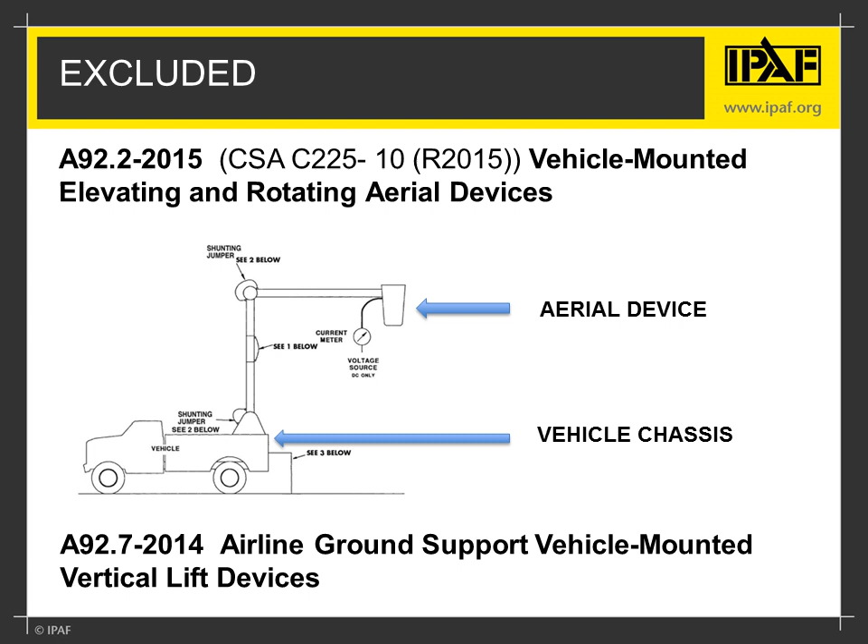So the list of current A92 and B354 standards listed by equipment type, which are in existence, will be moved over and covered by the design standards with, as I said, the noted exception that truck-mounted bridge inspection maintenance equipment will be included in ANSI and excluded in Canada.

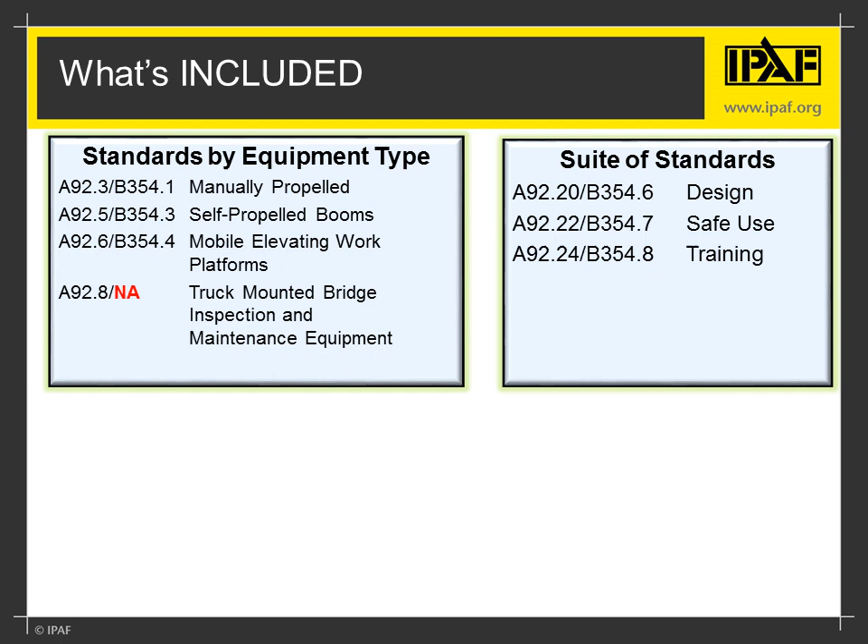So that's the type of equipment. To be clear, there are differences between the ANSI A92 standards and B354 standards. While there has been a desire to more closely harmonize industry standards worldwide, there continues to be variances. Some of the differences carry forward from prior variances in the existing standards.

The current Canadian CSA B354.1 portable elevating work platform standards previously included towable and track-mounted aerials and will continue to be equipment covered in the new suite of standards. The current ANSI A92 standards cover towable aerial work platforms in the A92.2 standard, vehicle-mounted aerial work platforms, which will remain as a separate and active standard, and as a consequence, the towable aerials will not be covered in the new ANSI suite of standards.

This is one example of why you need to read and understand the standards that apply to your country and have technical resources available to you to assist in the knowledge you need to comply with these standards.

Another example of a variance in the requirement is special inspections at 10 years in the B354 standards, which is not a new requirement and remains in the B354 suite of standards, but is not a requirement in either the prior nor the new ANSI A92 suite of standards.

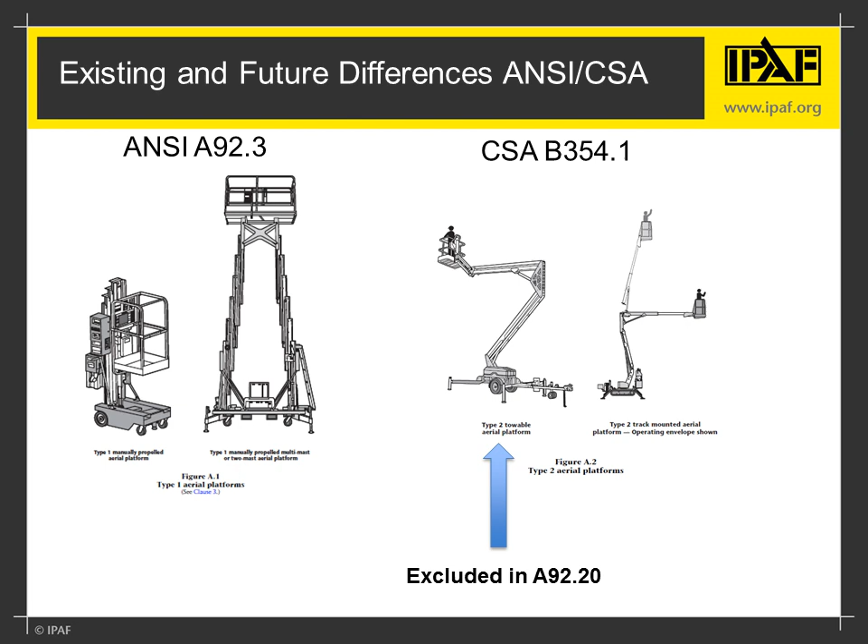So I need to clearly state that guidance in today's presentation is a summary of key changes and does not address all changes within the new standards. The standards must be read and understood to address all of your responsibilities.

The new suite of standards were drafted with the desire to bring country standards closer and harmonize language. The ISO standards were used as the foundation for the proposed changes of both the Canadian and U.S. standards. And the Canadian standards are relatively close in design to the language in the ISO standards, and when they were actually completed, the drafts were so close that the Canadian standards adopted the ISO standards with Canadian deviations.

The existing CSA B354 standards and the ISO standards were written around required tasks: design and manufacturing, inspection and maintenance, safe operating practice, and operator training. In contrast, the ANSI A92 standards were written with each section defining responsibilities for an entity - manufacturers, dealers, owners, users, operators. In this regard, the contrast between ISO and CSA B354 is much closer, while ISO and ANSI are significantly different. Additionally, the ISO standards are written by task.

So there's a design standard, a safe use standard, and a training standard that apply to all types of MEWP equipment. But the prior B354 and ANSI A92 standards are written by equipment type, such as portable elevating work platforms, self-propelled booms, self-propelled verticals, and scissor lifts. And the change in structure of the standards will make the initial change from the existing to new standards seem even greater. Keep in mind that the same equipment and the same basic tasks - design, safe use, and training - are there, but the structure of the standards delivering the wording is in a significantly different format.

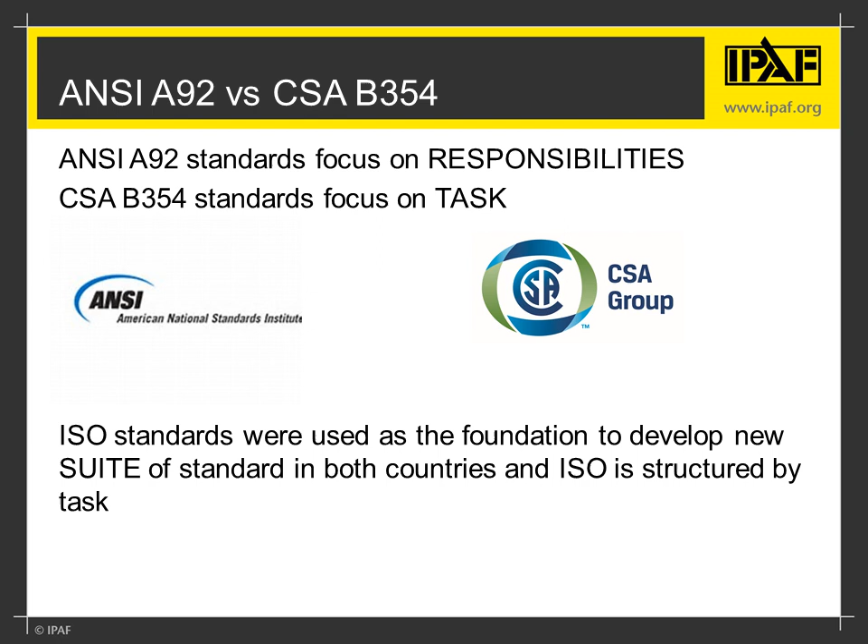The new design standard alone is 70 pages. The safe use standard is 26 pages, and the training standard in Canada is 8 pages long and 19 pages in the U.S., and we'll talk a little bit more about that discrepancy a little bit later. But you can understand that there are important requirements, changes, and details in the new standards that you must become familiar with.

To provide a particular word of guidance, the new B354 standards are an adoption of the respective ISO standards - design, safe use, and training - with Canadian deviations. As I have never seen an adopted standard with deviations before, I assume many other users have not either.

As simply as I can describe it, you are reading a section of an adopted ISO standard, and at the end of each section, you'll find a Canadian deviation that directs you to replace the entire section, or a paragraph, or a sentence of the section you just read with new language. This can pose potential errors if you do not apply the correct language.

I caution you to take the time to cross out language that is to be replaced in your copy of the standards to ensure that all deviations are applied as required. As you can see in the example, the section above that's not highlighted is the old language, and the section that's highlighted is the new proposed language, and that's one section of one of the standards.

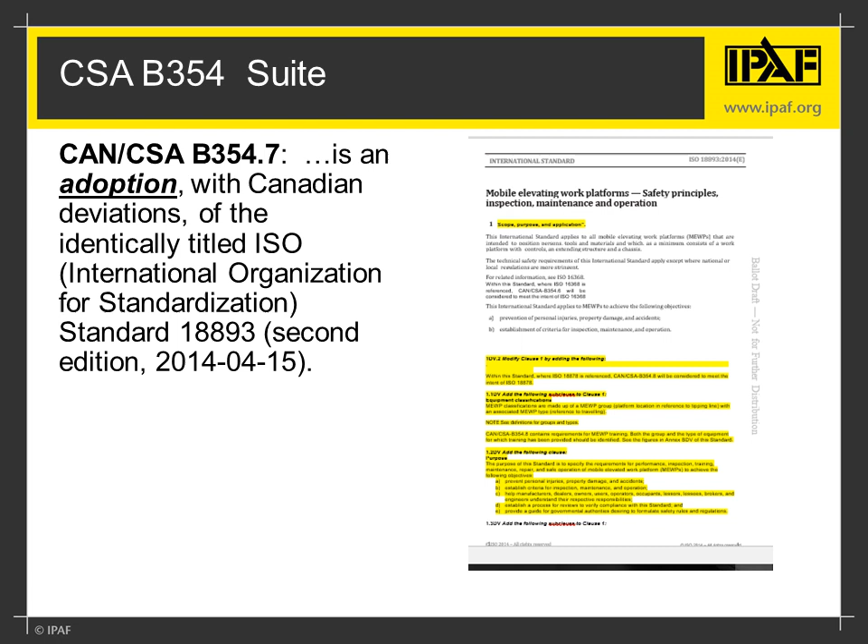My final general point in the analysis and understanding of the new standards is that you must read and understand the language of all the standards to ensure you identify and understand your responsibilities. As an example, a user cannot assume they can only read the safe use standard to identify all the responsibilities. A user will also need to read and understand the training standards that have user responsibilities, even if they outsource training to others.

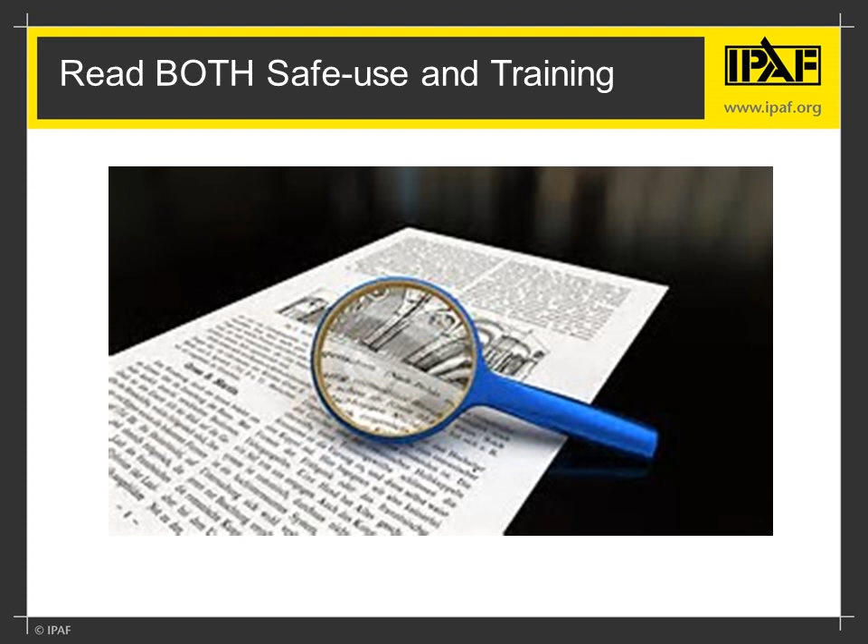So let's start looking at the changes in the standards themselves. Even with harmonization as a goal, and having several companies and individuals who sit on both ANSI and Canadian standard subcommittees, we didn't achieve full harmonization between U.S. and Canadian standards on all language, starting with terms and definitions. This slide offers a few examples of new terms used in the standards.

All machines and devices manufactured under these standards will become known as Mobile Elevating Work Platforms, or MEWPs. That term comes from existing ISO standards being used internationally. So get used to hearing the term MEWPs in lieu of AWPs when addressing this equipment. You'll hear me use that phrase throughout today's presentation.

Operation manual is a new term and definition addressing all manuals provided by the manufacturer required to be stored on the MEWP in a weather-resistant storage compartment. At a minimum, the ANSI A92 standards require that the operation manuals include the operator's manual and a manual of responsibilities. It should be noted that the CSA standards concluded they needed to be an adoption with deviations, and when that occurred, some of the detailed language agreed upon, like this definition, is going to be different in the U.S. and Canadian standards as we move forward.

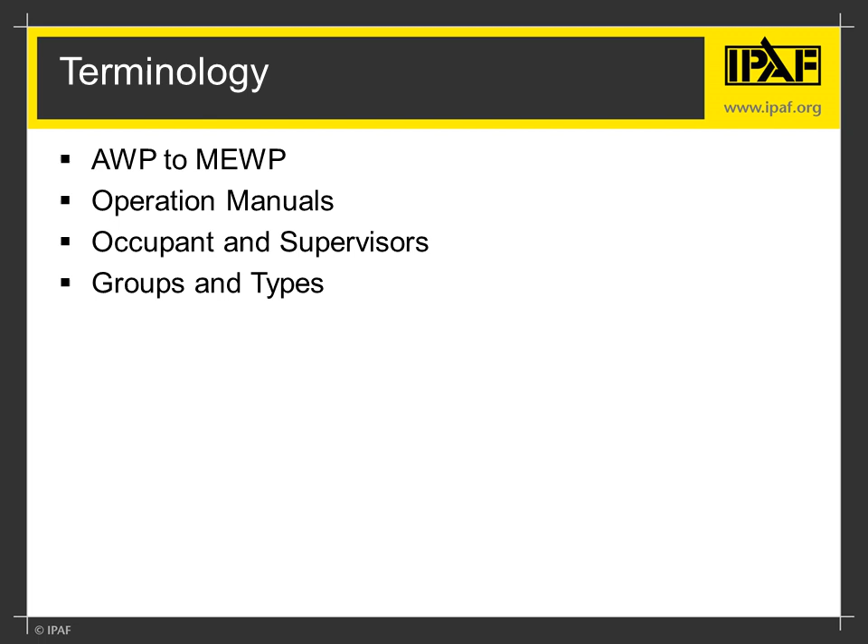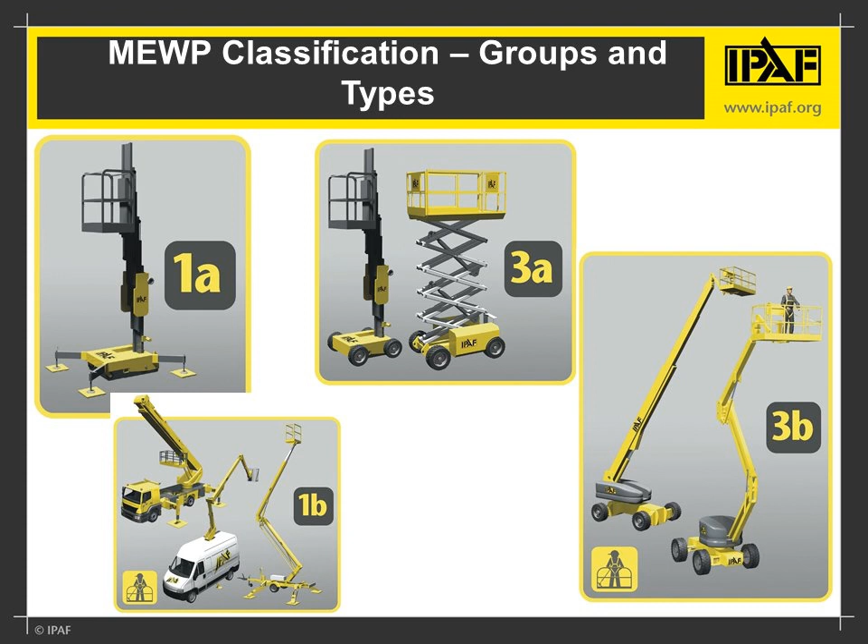And the terms groups and types combined create what we call MEWP classifications. These are examples of MEWP classifications that require operator training and are defined by a combination of a group and a type. Group A is a platform that elevates over the chassis, and Type 1 are lifts that are not mobile when the platform is elevated out of the stowed position. So that's a 1A. It will take a little time to get used to these terms, but it's not rocket science, and after a few years, you'll forget about this conversation because you'll know these as fluently as I do today.

So let's begin with some details of the design standards. The design standard in the U.S. is A92.20. In Canada, it's B354.6. While most, aside from the manufacturers, will likely need—only the manufacturer is going to need to read and understand this in detail—everyone in the industry is going to be impacted by significant changes in the design standard. The following slides will identify some of the issues that will impact users resulting from these changes.

While I have not thoroughly analyzed variances between the design standards in the U.S. and Canada, I can comfortably state that the manufacturers will design one machine that will be compliant with both the U.S. and Canada.

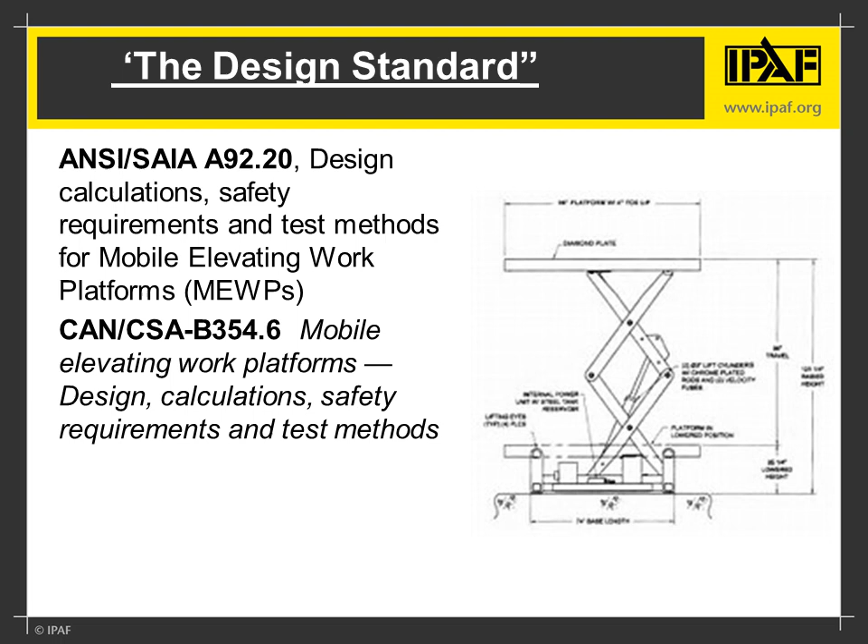So let's look at some of the highlights of changes within the design standard.

The design standard will require manufacturers to provide means so owners may document on the MEWP when the last annual inspection was completed. This was never in the standards before. Now it is a requirement for manufacturers to provide, and owners to place on MEWPs, Mobile Elevating Work Platforms.

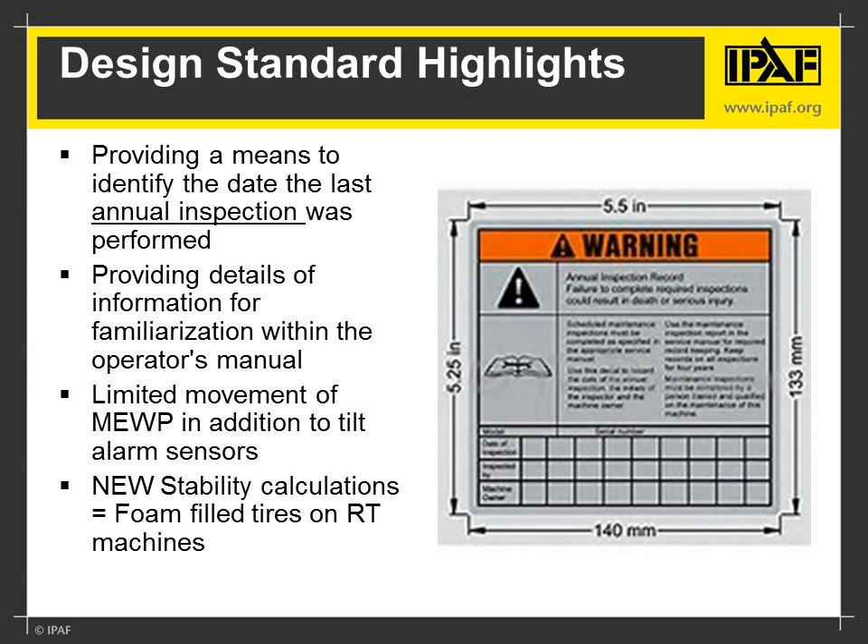That will result in an increased level of stability required at a greater slope and will result in foam-filled tires likely being used on most all rough terrain aerials, booms and scissors, basically because of the high gradability we want—you can't get it with a flat tire. So that's going to be an impact. You're going to see foam-filled tires on many or most rough terrain equipment in the marketplace.

Another significant design criteria is platform load sensing. While no one should have been overloading the platforms before, this is new—the first time many people will be exposed to platform overload systems in the North American market. So awareness, training, and work planning will become more important. Although the rated workload should never have been exceeded, it likely was, and will create issues for users if they don't plan in advance what loads will be placed in the work platform.

If you overload it when you're on the ground, it's easy enough to take the load out. But if you're elevated and taking something down, adding that weight, reinstalling it is probably not an option you want to take, and the equipment will not continue to function normally unless the load is removed.

Load sensing technology has been around for many years, and while it does add some complexity and service requirements, the use of MEWPs specifically with this technology has been successfully used in many countries around the world for years.

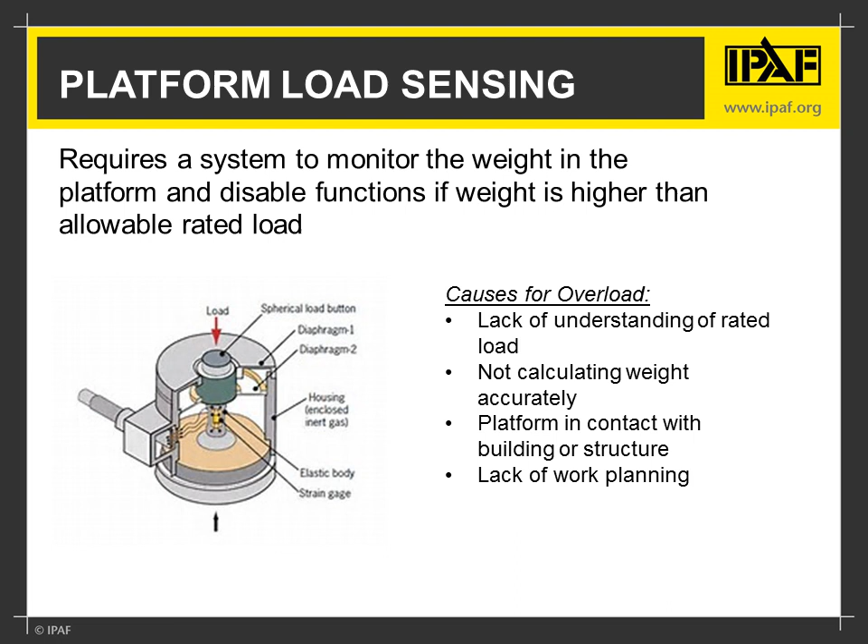Boom-type lifts will likely use load cells to measure platform load sensing, while scissor-type lifts will use a combination of scissor stack angle sensors, pressure transducers on lift cylinders, or load sensing pins. Dealers and owners will need to get their service technicians qualified on how to maintain this equipment.

There's a list of other design criteria that will also have some impact. The use of chain gates is now eliminated, and toe boards will additionally be required at the platform entrance gates. This does not require a change on any existing equipment manufactured to existing standards, but everything manufactured from the effective date forward must be compliant with the requirements stated in the design standards.

MEWPs may also be designed for indoor use only. Wind loads do not need to be taken into consideration since they're indoor only, and this shall be clearly marked in an easily visible place. So now you can have a machine that is only to be used indoors where there is no exposure to wind.

Guardrail heights have been increased from 1 meter (39.5 inches) to 1.1 meter (43.5 inches). This additional height will result in smaller MEWPs no longer being able to fit through a standard door with rails deployed. This will require additional user familiarization on the need to fold railings when driving through standard door openings.

Wind loading is changed from a safety factor-based stability calculation to stability calculations that include wind load formulas, increasing the impact from wind loads in the design. The impact with boom-type lifts can be an increase in the machine's weight or more restrictions on what size material can be placed in the platform.

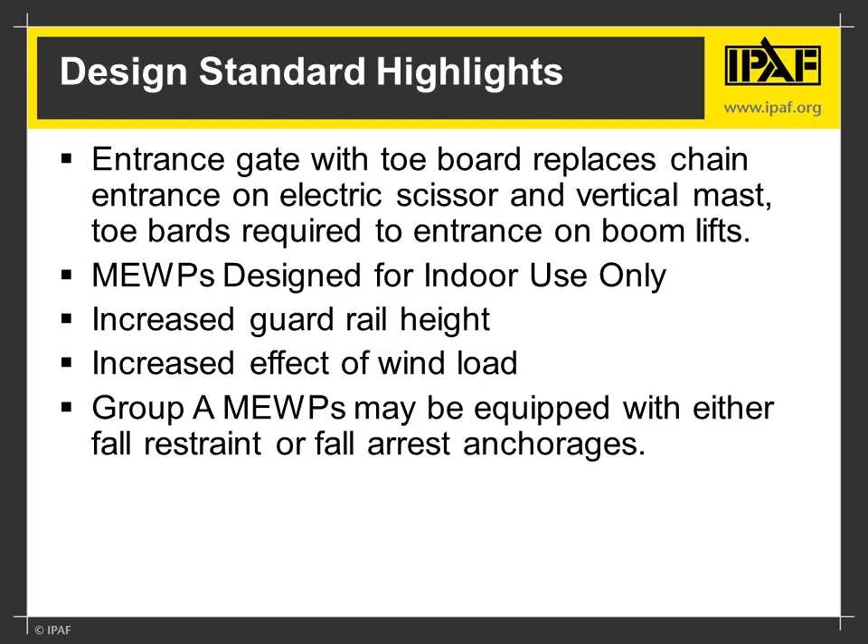Any design issue that impacts safe use must be incorporated into training or familiarization as appropriate. So the introduction of indoor-only MEWPs is an example of knowledge an operator must be aware of. The design criteria has information the manufacturer used, but it has a downhill flow to both safe use and training.

There will be many benefits in the ability to control loads with platform load sensing, allowing manufacturers to design a broader and more diverse offering of models that can provide higher capacities. Now that we have platform load sensing, you'll likely see additional capacity offered through many of the machines in the marketplace. For example, you'll most likely see 600 pounds and 1,000 pounds on many of the booms designed with load sensing included.

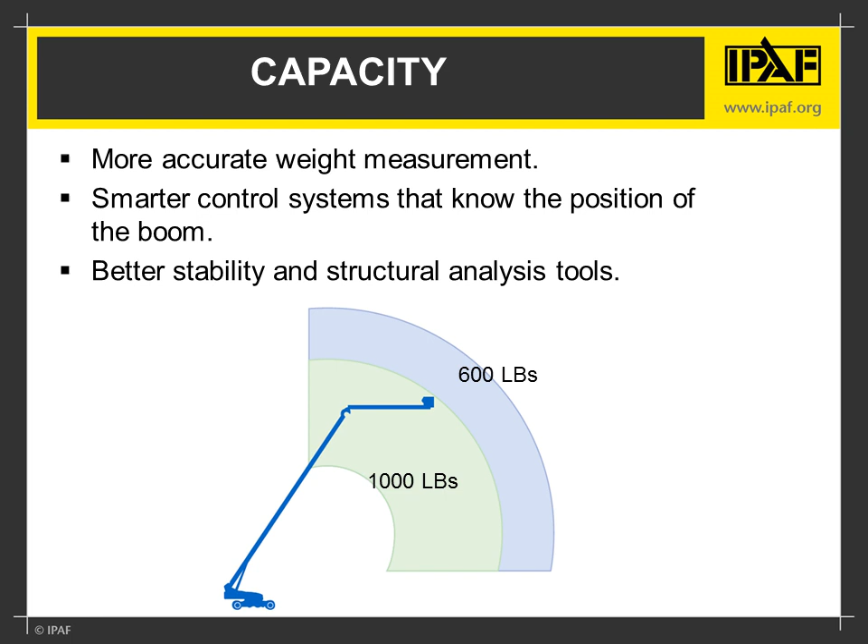That gives you a summary of some of the elements included within the design standard. Now we'll move to the safe use standard, which is A92.22 in the U.S. and B354.7 in Canada.

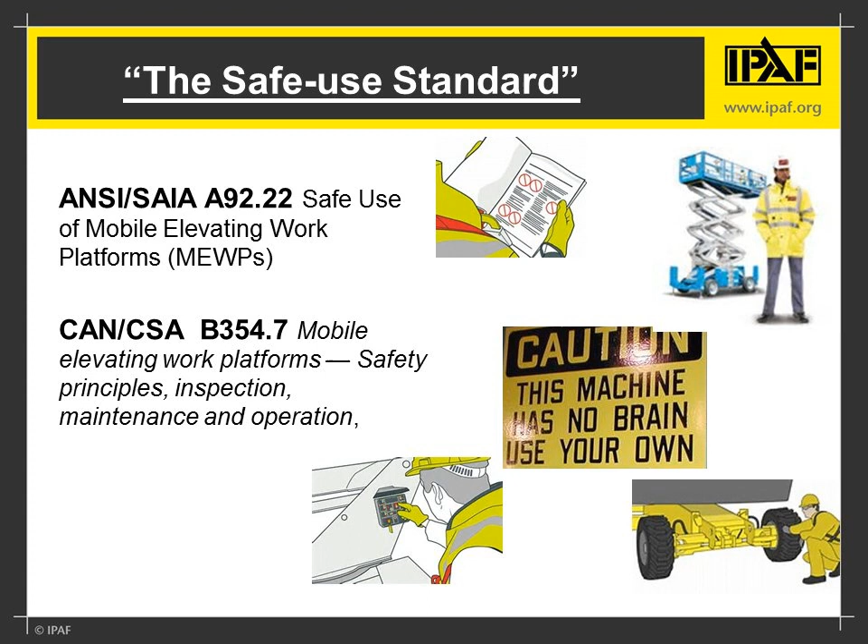Responsibilities are a key issue throughout the ANSI standards, and while responsibilities are defined throughout the CSA standards, it is not as thorough in assigning every section with specific responsibilities.

In creating a standard that is not segregated by section or by entity, we don't have a user section, an owner section, an operator section. You need to read the responsibilities more clearly and understand that any entity, such as a dealer, may have the responsibility of other entities. A dealer who is supplying equipment to other people may also be a user of the equipment. Whenever their employees are using it, they're now a user, and they could be an operator. So whenever you take on the responsibilities or complete the task defined by the definitions of each of these entities, you will assume those responsibilities.

ANSI has introduced new terms in the operations manual. As we mentioned earlier, we've added occupants and supervisor responsibilities, and specifically we'll get into the training requirements for those later on.

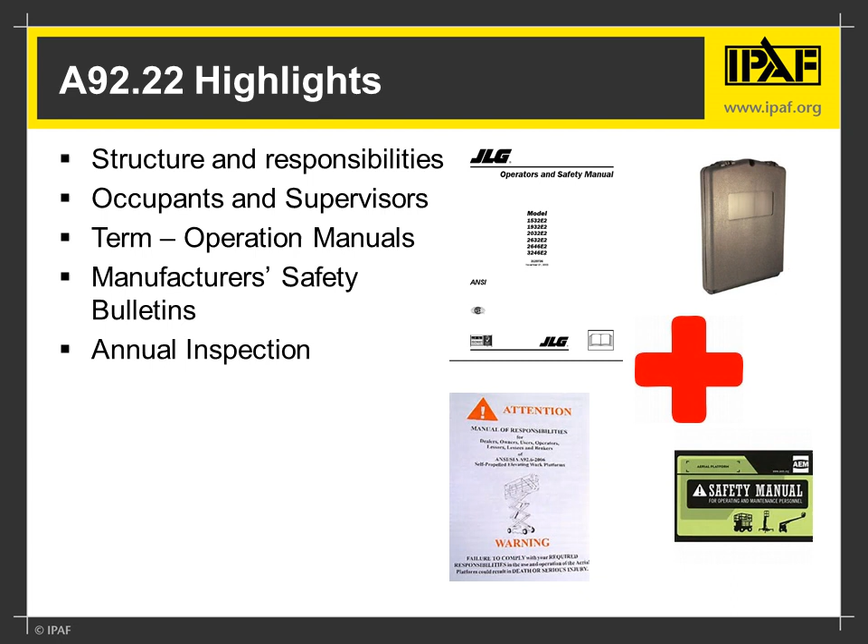Manufacturers have had safety bulletins out for a long period of time. That term has been used numerous times throughout the standard now, to ensure that anyone who's an owner of the equipment gets the equipment registered with the manufacturer. The completion of any open manufacturer safety bulletin is a requirement within the frequent and annual inspections, so you can't get those things done without being registered with the manufacturer. The manufacturer safety bulletins are well expressed in multiple sections within the new standards.

Familiarization: the design standard, as I said, is the foundation for the three standards, and requires manufacturers to list in the operator's manual a listing of MEWP functions, features, operating characteristics, limitations, and devices that must be included in familiarization—all topics to be addressed in familiarization for that particular machine. So that will be coming out.

The ANSI Safe Use Standards define dealers as responsible for providing familiarization upon delivery. Now it will read: when requested by the user, dealers will offer familiarization. So the strict liability in both the U.S. and Canada for providing familiarization at the point of delivery by a dealer has now been moved from 'provide' to 'offer.' That's a significant change.

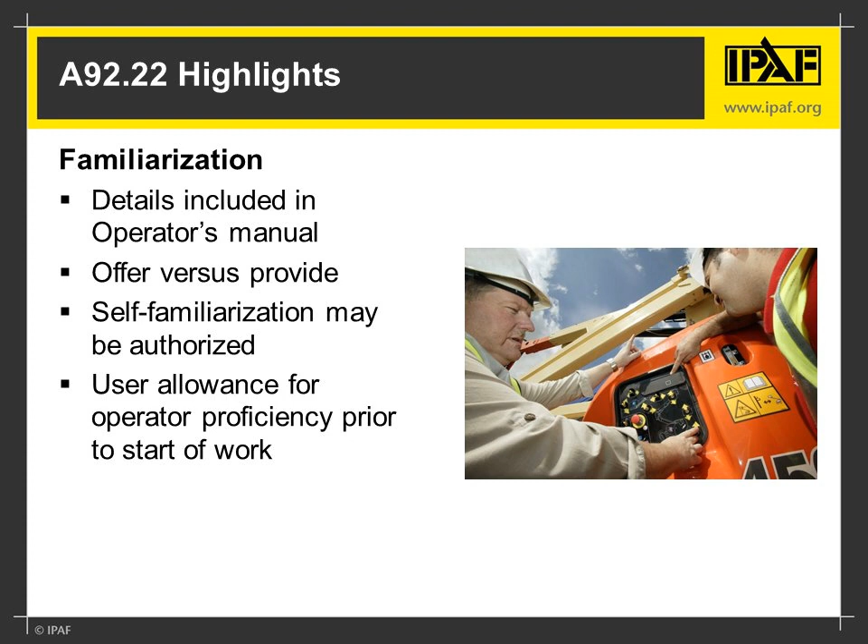The operators' manuals now require a list of items to be covered in familiarization. Language has been added in the ANSI standards to allow self-familiarization by an operator when authorized to do so by the user employer. There is no such language for self-familiarization in the Canadian standards. The ANSI standard requires a user to allow the operator time after familiarization to become proficient with the operation of the MEWP. That also is only in the U.S. ANSI standards. So those are changes that impact familiarization within the standards.

Additionally, in the safe use standard we have training requirements. The training standard tells you how to deliver it, but the training requirements are within the safe use standards. New is that the user must ensure that personnel selected to be MEWP operators are both physically and mentally capable to perform tasks. B354 adds visual and auditory to those qualifications. So the first step is that we now have criteria for qualifications for someone to be considered an operator by the users. The ANSI standards require users to ensure that operators provide occupant knowledge as defined in the training standard, and also ensure personnel that directly supervise operators are trained as defined in the ANSI A92.24 section.

B354, the Canadian standards, also require occupant knowledge to be delivered by the operator in operator training, but does not require and provide detailed requirements for supervisory training. In my opinion, B354 requires many tasks that users do that include operator evaluation that must be completed by qualified persons. So while supervisory training is not a written requirement within the Canadian standards, I would say somewhere along the line someone in the user's fold needs to become qualified, and that's only done through training. Some of the requirements within the standards for users in the Canadian standards, such as evaluating the operators, can only be done by someone who is familiar with all the elements that are defined within supervisory training defined in the U.S.

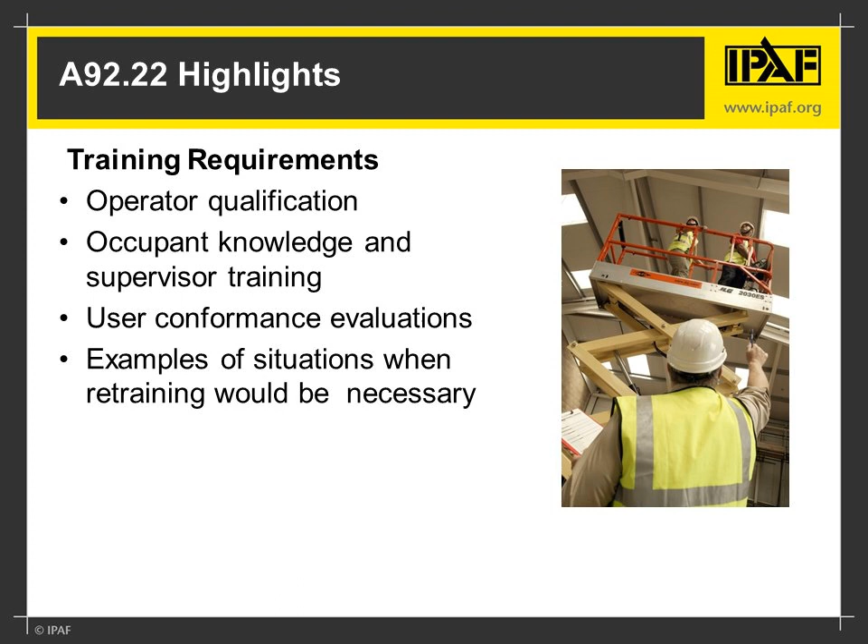Again, retraining was previously required only if necessary based on the user's observations and evaluations. The language now is getting a little bit more specific, and it offers multiple examples of possible reasons for retraining that would be or may be considered to be included as a requirement for conformance evaluations. So a significant change.

Further, in the A92, the ANSI and CSA standards require maintenance and repair personnel are trained, versus prior language that just stated they must be qualified. The CSA language added the requirement that the owner, where the MEWP is being rented, has to identify the entity that will be responsible for inspection and maintenance activities. This issue can be very critical, especially on long-term rentals - knowing who's doing all of those inspections, repairs, and maintenance to make sure it's clearly understood when this equipment is out on rental. That's a very specific statement within the Canadian standards, not stated in the ANSI standards.

Talking about modifications - changes to a MEWP that can affect the operation, stability, safety factor, rated load, or safety of the equipment in any way - that's how we define a modification. The B354 standards provide specific requirements for documentation, decals, additions to the operations manual, etc., when a modification is made to a MEWP by a manufacturer or by an owner. A92 adds additional language to ensure that users ensure supervisors and operators know that only an owner can authorize a modification to a MEWP. So again, we're trying to raise awareness that modifications have historically only been those things approved by the manufacturer, which is still language within the standard, and trying to make sure that people aren't out there making changes to the machines that can impact, as the definition would say, the stability, safety factors, rated load, or safety of the equipment in any way.

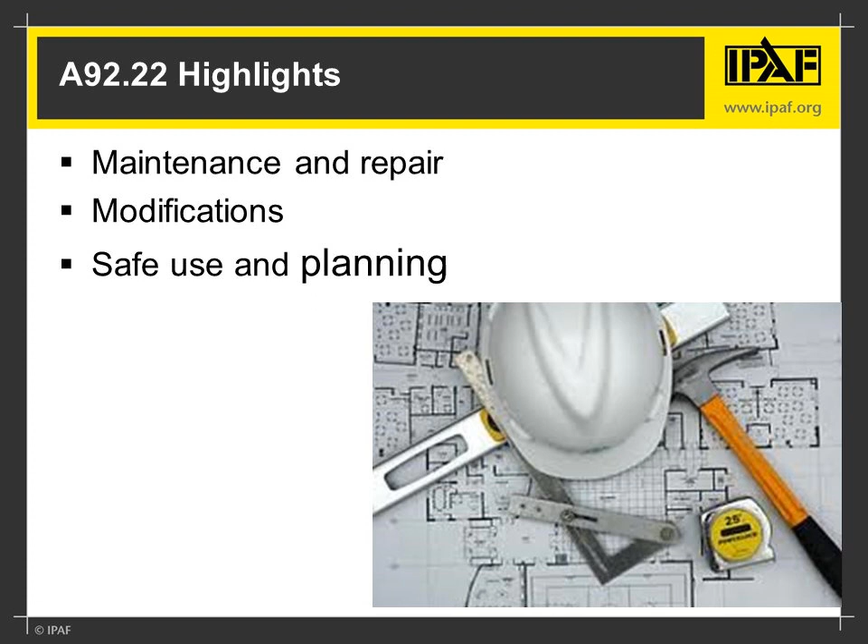It also introduces the user requirement for trained and qualified supervisors in the ANSI standards, which includes the selection, provision of use of suitable MEWPs, the access, preparation, and maintenance of the site as required. So even when we use the Canadian standards and say this is the user responsibility, someone needs to be properly trained to become qualified to do these functions in Canada, despite the fact that we're specific about supervisory training in the ANSI standards and not in the Canadian standards.

Just going into a little detail on the risk assessment. This is a whole new section, so it deserves a little bit of time. It is in both standards, and it requires a risk assessment to be carried out by the user. Additionally, each training standard requires compliance with safe use standards and knowledge of the risk assessment by the operators and occupants. Any use, starting with operator training, requires a risk assessment, and the operator training must include a site risk assessment as well. Added in the risk assessment is the requirement for a rescue plan from height that must be

developed and communicated with the operators. This is becoming of greater importance as the height of MEWPs increases to elevations of 185 feet. Calling 911 is not a rescue plan, especially when fire departments can't reach that height themselves.

The complexity of any risk assessment depends upon the task and the hazards associated with it. A risk assessment during operator training or changing lights will be much more simpler than MEWPs being used on the construction of a new site. That will be much more detailed.

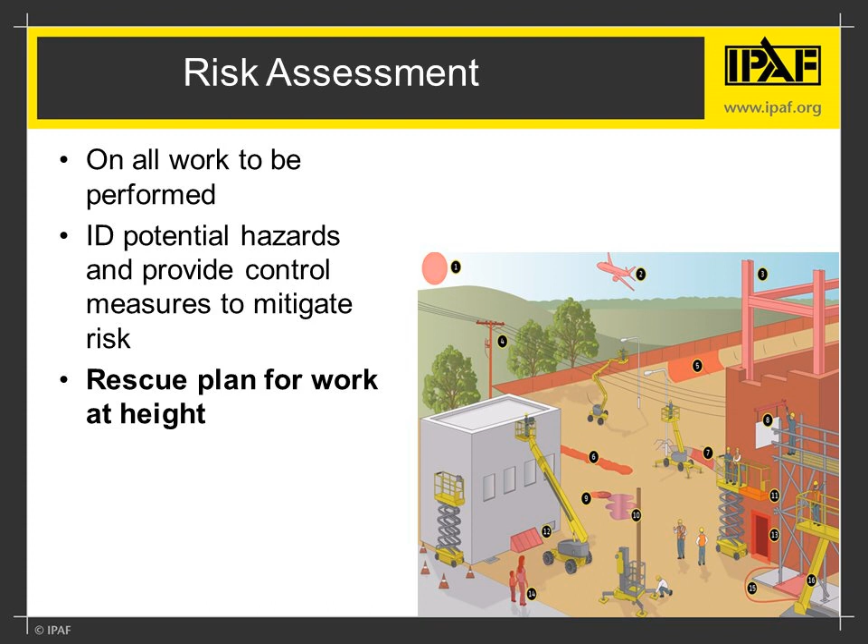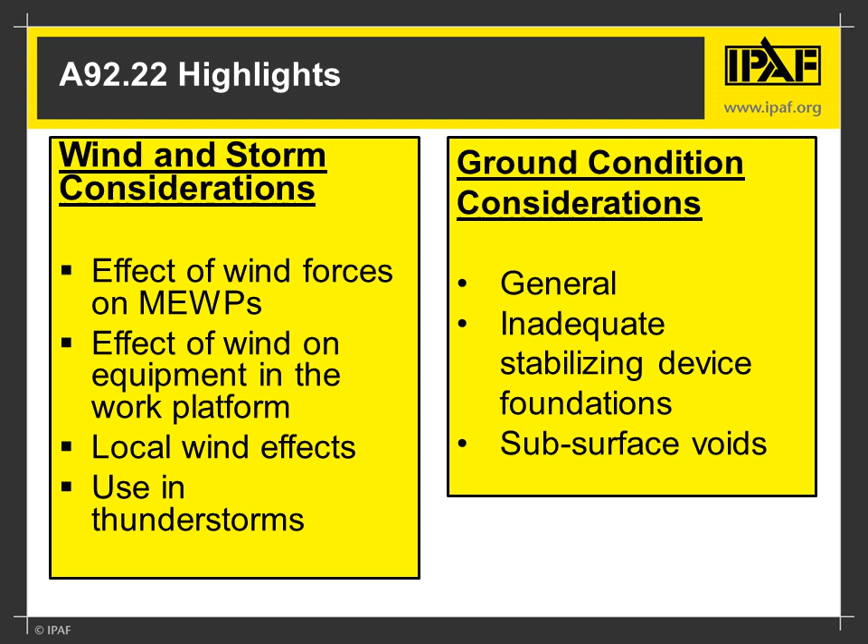Further in the Safe Use Standard is the provision for wind and weather, which were mentioned only once in the prior standards as one of 10 possible hazards. It's pretty much said, look for wind and weather. The new standards offer very specific topics in detail to be considered in both the risk assessment, use, and training. The same added details are provided for ground conditions, which a MEWP will be supported. So you end up seeing that both of these items have much more detail in terms of what it takes to be safe in considering wind and storm conditions and ground conditions.

We have new language related to ventilation in both standards that protects against a known potential hazard. Just as required with battery charging or refueling, internal combustion engines must be used in a well-ventilated workplace. CO poisoning can occur when an internal combustion engine is used in an enclosed area without proper ventilation. So while we were silent on it before, it did not mean that this didn't have to be accommodated if you did proper risk assessments. Now we're adding in specific language to ensure that when a risk assessment is done, all the issues that we know can adequately be addressed.

There are two new requirements in the standards addressing entanglement. A92 says users shall avoid these applications if possible, and operators shall take precautions to avoid entanglement during operation. This builds on the requirement for planning. So when you're looking at it saying users should avoid this application for entanglement, how could they have avoided that to begin with? That's in planning.

Further, B354 adds language that particular care shall be taken to prevent striking or interfering with MEWP controls. This adds to the potential hazard of pulling a lift over with cables hanging down from the platform, and really adds to that any potential impact with the controls on the MEWP platform.

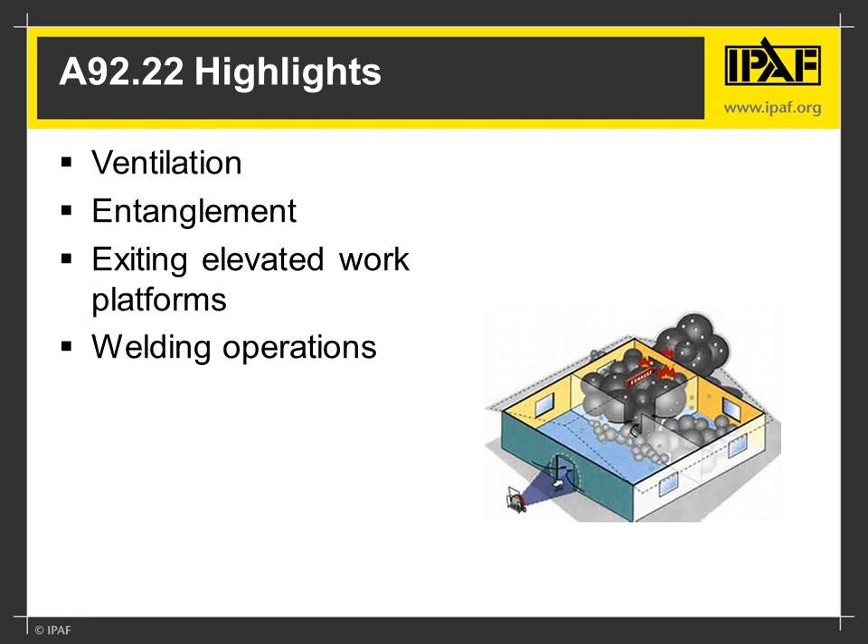So again, you can see that there's a wide range of items that you may have thought about before and may have thought were addressed before, but now they're specifically listed within the standard and bring attention so that everyone who's doing a risk assessment can address these things in detail.

When it comes to electrocution hazards, unfortunately we recognize that electrocutions are one of the primary causes for fatalities associated with aerial work platforms in our industry, so it's really an area of high concern. Prior statements in standards said that all applicable safety work practices intended to address electrical shock shall be defined and explained to the operator by a qualified person. While acceptable, it's known that electrocutions have occurred when operators are performing other tasks and get too close to energized lines and other types of electrical hazards.

The ANSI standards start with the requirement in the new standards that say you must be a minimum of 10 feet away from energized lines, and only closer if a qualified person allows that. So very specific, so that an operator understands that I need to stay at least 10 feet away from the extended boom, with any reach, from a powered source.

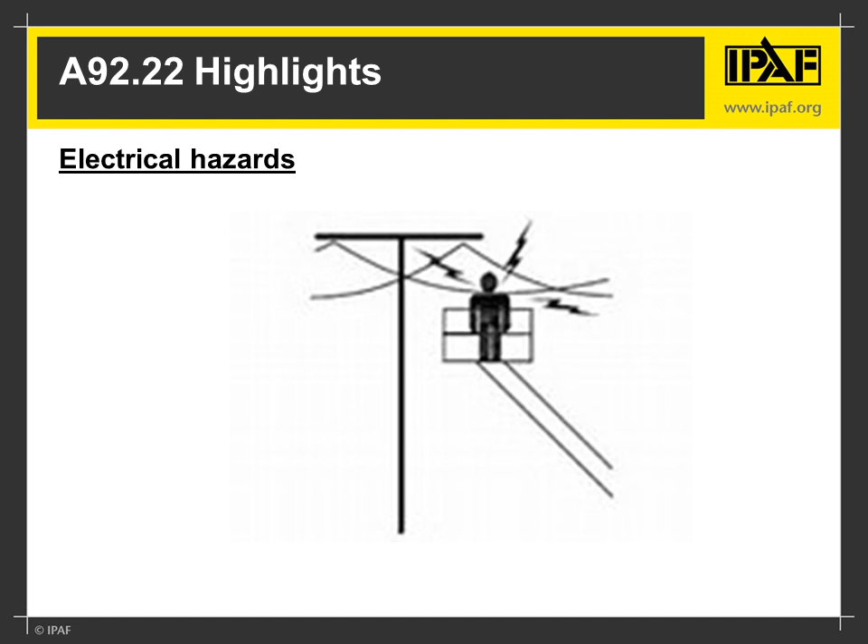Whereas the U.S. standards have really come out with a pretty simple statement, which is a minimum of 10 feet away. So those are the differences between the approaches and the new language there.

The A92 standards have included under-bridge inspection equipment, so it's a logical addition of language for working on public roads. However, both ANSI A92 and the B354 languages have language to address transporting and traveling on public roads. As we all know, it's very common to load and unload on public roads, and safety measures must be introduced to address these operations, even when you're moving equipment from point A to point B on a site that may cross a road.

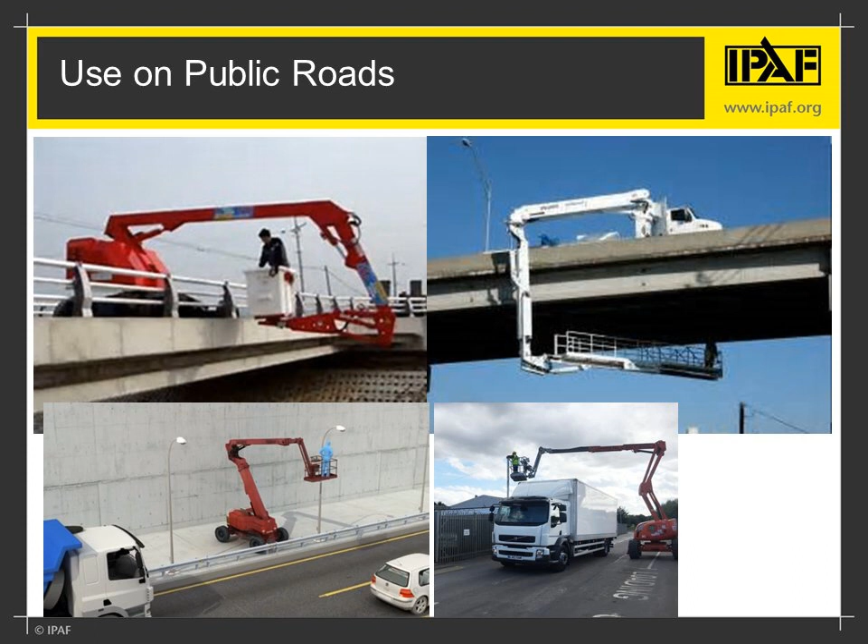So that concludes my points in relationship to the Safe Use Standard, and now we'll move to the last section, which is the training standard. The training standard in the U.S. is A92.24, and B354.8 in Canada.

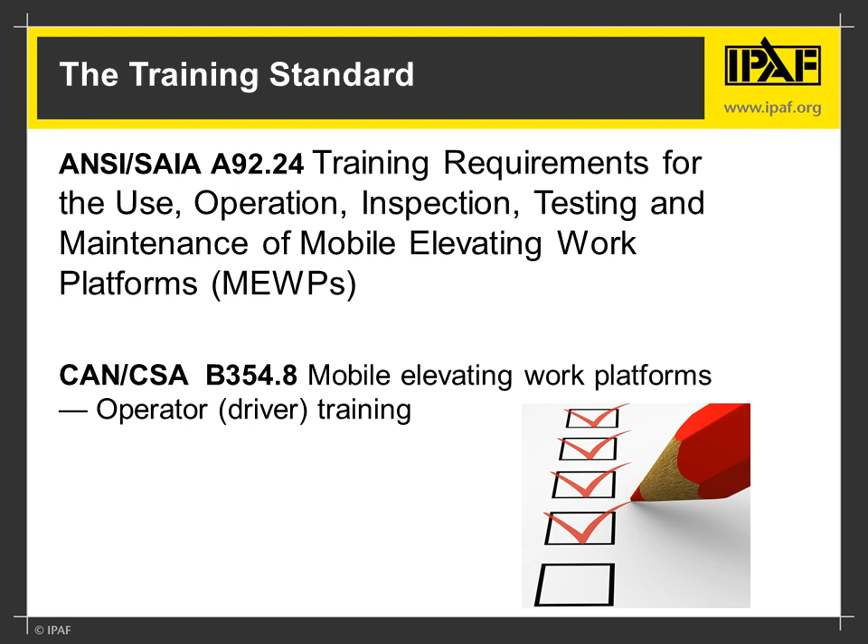With the introduction of a standalone training standard, there are details provided on the methods and guidelines to prepare MEWP training materials, administration criteria, and elements required for proper training and familiarization. Training will be required for different MEWP classifications, and for each classification shall be identified by a group and a type, that we showed earlier: type 1A, 1B, 3A, 3B, as the example.

Theory or classroom training can be offered through a qualified trainer, instructor, or newly stated within our standards, online courses. An extensive list of content required to be included in the theory training is now provided. Practical training, where each trainee is required to operate the MEWP for a sufficient period of time to demonstrate proficiency, provides detailed requirements that must be included in this training and evaluation.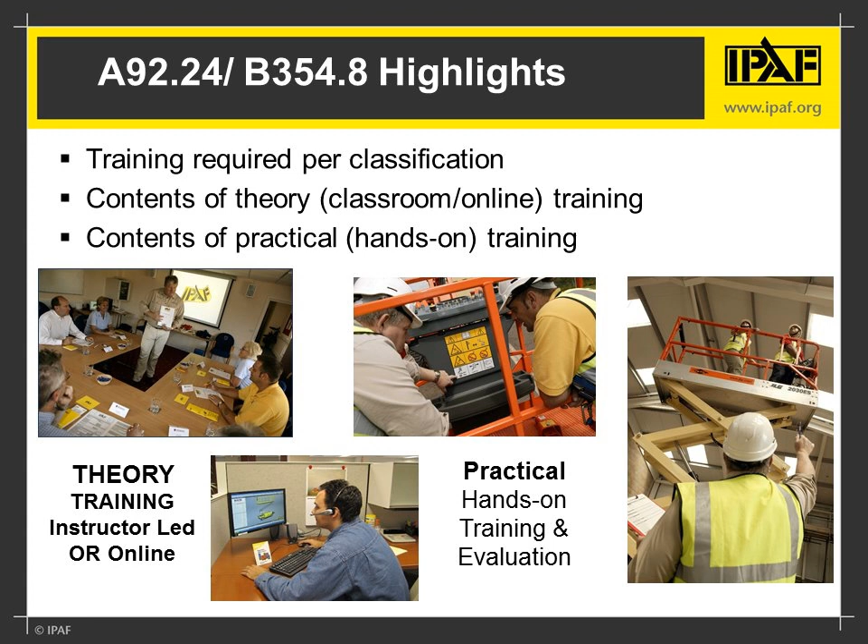While in the U.S., OSHA has been very proactive on the issue of employers' training obligation to ensure that information is presented in a manner that the recipient is capable of understanding, OSHA issued a policy statement that states in practical terms that instructions must be used in both language and vocabulary that the employees can understand. The ANSI training standards adopted this OSHA requirement in the standards to make this issue a clear responsibility.

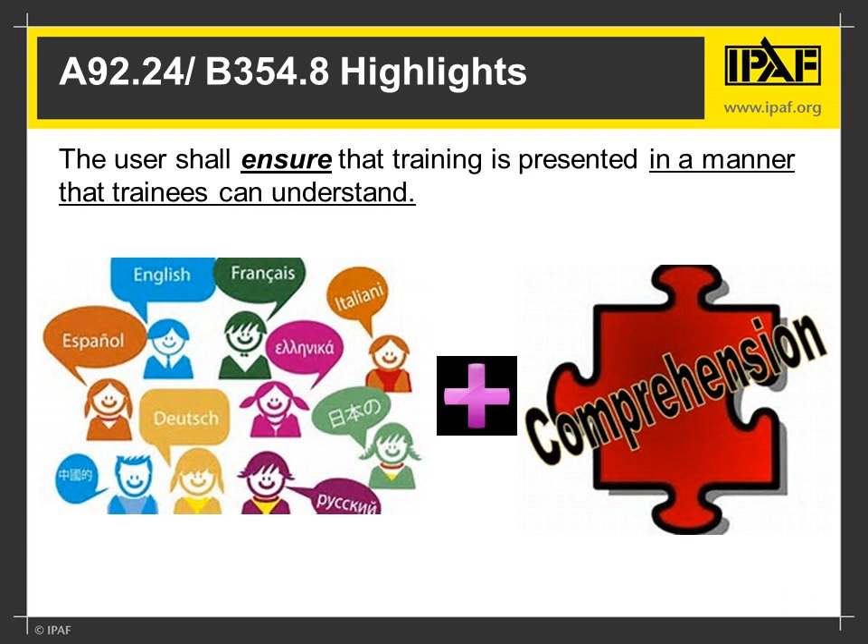You cannot have an employee who cannot adequately understand English attend training delivered in English and expect the training to be effective. It is the employer's obligation, or the user in ANSI terminology, to ensure that the training provided, internally or externally, is such that the trainee can understand it.

In both the U.S. and Canada, the inclusion of occupant knowledge has been added. Occupant knowledge means the user must ensure that either the MEWP operator shall provide the instructions or otherwise ensure all occupants have a basic level of knowledge to work safely on the MEWP.

So the user must ensure that the occupants get that knowledge. Operator training now includes them delivering that knowledge required through MEWP operator training. And while it is not the exclusive responsibility of the MEWP operator, it is that of the user, because the user can go train all of his occupants in a separate class. The MEWP operator needs to make sure that he offers that at the time when they get on the machine.

So it's kind of like when you're the driver of the car and someone gets in and you tell them to put the seatbelt on. We want you to be connected with your personal fall protection. So it's very basic information.

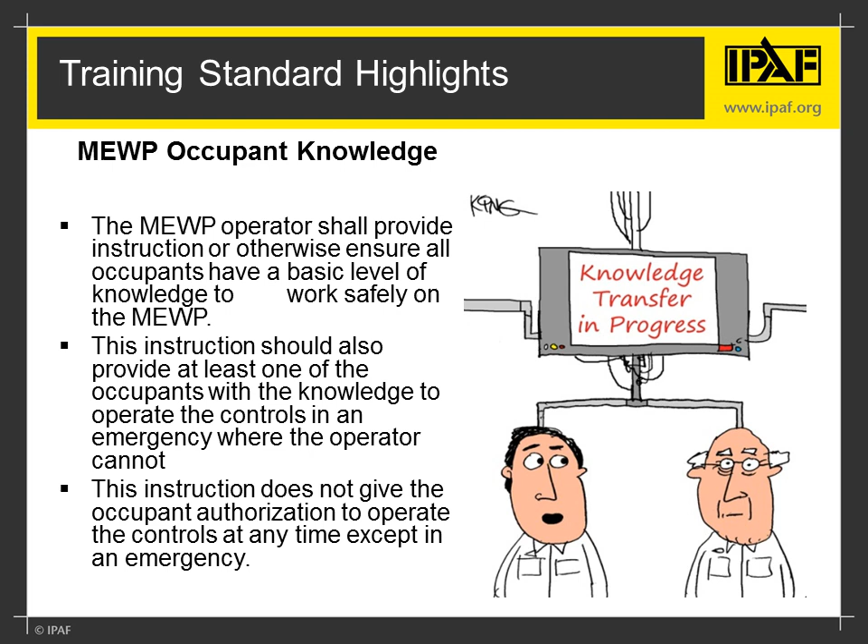So you can look at those instructions, and I'm not going to go too far into the details, but know that occupant knowledge is a new requirement, and it is a responsibility for the user to make sure that the occupants receive that knowledge, and it is a component of operator training for the operator to provide it to occupants when they get on the machine.

Regardless if the task is simple or complex, performing the task safely and efficiently requires qualified persons to plan and implement the work. The A92 has a new requirement for specific MEWP supervisor training. As I stated earlier, the user employer has the ultimate responsibility for employee safety, and work must be performed by qualified persons, as stated in both standards.

With the added requirement for operator evaluations, risk assessments, rescue plans, etc. in both standards, a user must ensure that a qualified person is assigned to the task, and the supervisor's training is a great tool, even if not a specific requirement, as I'm referring to the Canadian standards. It is a requirement within the ANSI standards.

It is not a specific requirement for supervisory training or any type of training for the user. However, as I stated, with all of the added and specific requirements that the user must undertake, including the evaluation of operators, you need to have someone qualified to do that, and this would be a great place to look.

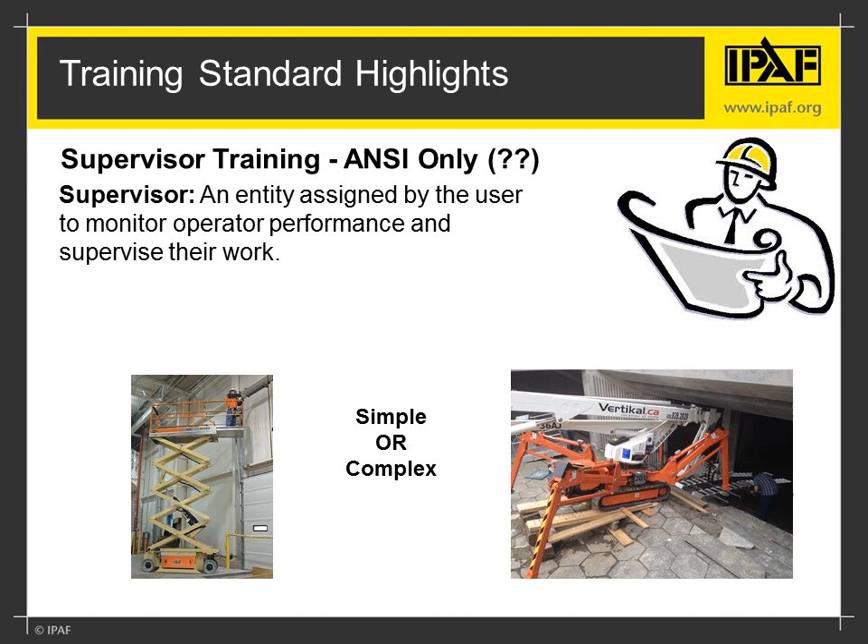It's also important to note that the new standards provide theory, classroom, online, and practical hands-on evaluations to be documented. So when you have this to be documented, new in both the ANSI A92 and B354 standards are non-compulsory annexes.

These annexes have specific examples for knowledge evaluations and practical evaluations for MEWP operator cards and authorizations to operate cards. So while this is informative, the examples set a foundation for some level of standardization of what would be expected within our industry. I encourage all of you to look at the annexes and make sure that any training you are providing or having provided to you incorporates this level of documentation to ensure that the proper training takes place.

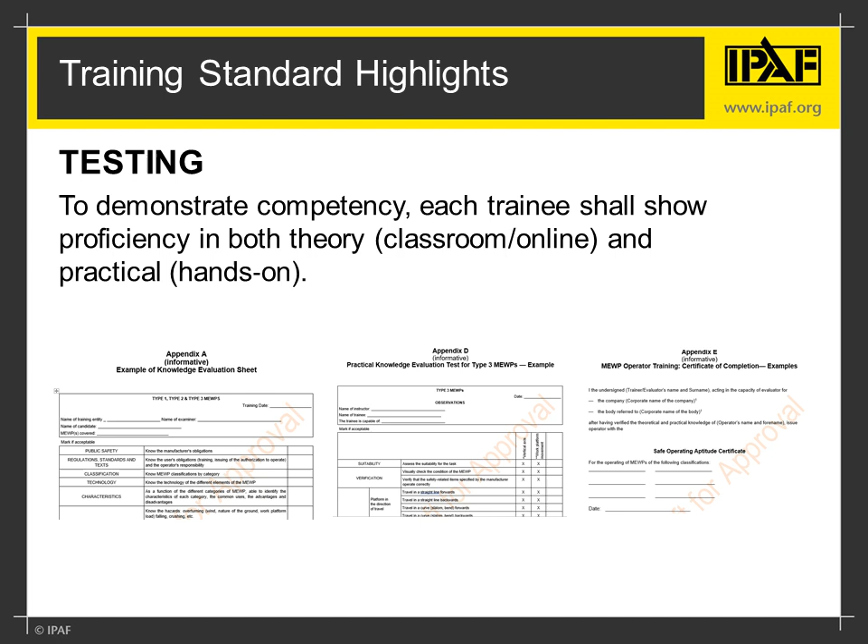And that pretty much summarizes the changes that I have identified. When you visit the IPAF website, you can obtain many valuable resources, particularly under the Publications and Film tabs and Resources tabs.

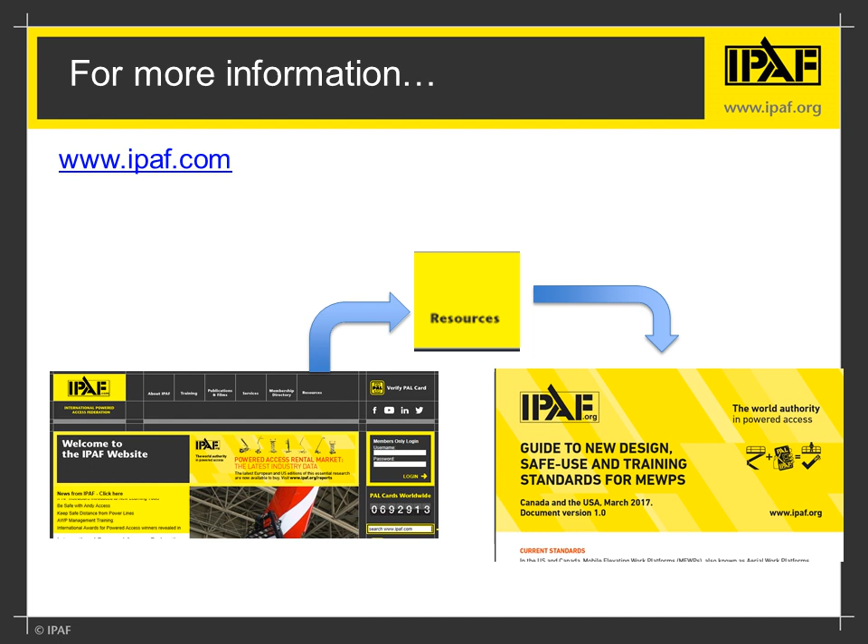Under the Resource tab, you will find technical guidance notes that include a white paper that was drafted, IPAF New ANSI and CSA Standards, Key Changes and Compliance Advice, that you can download and use within your business or share with your customers. So that's a tool that's out there for you to look at and utilize.

And with that, I'm concluding this presentation, and I'm open to questions. Okay, thank you, Tony. This is Stacy. We do have several questions, so I will go ahead and just jump in if I may.

Please, go ahead. What ANSI standard is the towable boom covered in? The ANSI towable boom standard is covered by ANSI A92.2, vehicle-mounted aerial work platforms. That has been the standard that has covered it, and it is the standard that will continue to cover it with the changes. Okay, very good.

Will manufacturers of trailers, towable MEWPs, sold to Canada be expected to comply with both CSA B354.6 and C225?

Well, whenever you're selling in any country, you must be compliant with the standard of that country. To state it differently, a manufacturer who is selling into Canada must be compliant with the CSA B354.6, which is the design standard that covers the towable booms, and in the U.S., ANSI A92.2. Now, whether a manufacturer can combine those and have a towable boom that is compliant with both is not a question that I can answer, but my assumption is, if at all possible, the manufacturers will make it compliant to both.